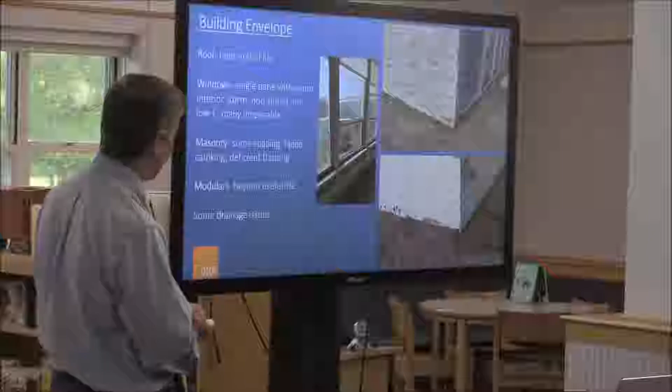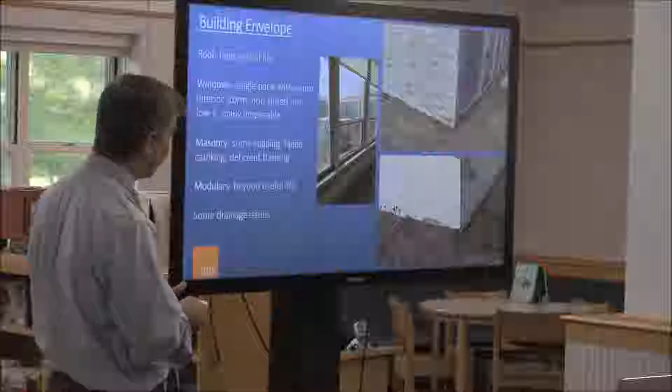We evaluated the physical aspects of the building too, looking at how well things are functioning today, what state they're in - a lot of materials and systems are at or near the end of their life. The building's 60 years old, some materials are still original. Certainly some maintenance has been done over the years, but it's still difficult to keep up with certain things in a way to meet accessibility requirements and so forth.

So there are various physical needs that would need to be addressed in any case, even if no project happens in the near term. By near term, we generally say 5 to 10 years that some of these things are going to need to be addressed.

That kind of summarizes it, that there has been good maintenance, but still, when things are at the end of their life, it's difficult to get parts and difficult to maintain. And certainly they're not energy efficient and don't meet those kinds of standards for equipment, motors, and building envelope of today's standards.

It's not strict, there's some room for negotiation. Certain things are strict, like they want science rooms to be 1,440 square feet — that's one of the hard and fast rules. Other things, like the size of an auditorium, have guidelines, and you can build it bigger, but if you do, the part beyond their guideline isn't eligible for reimbursement. So they use this form to make sure there's parity across the state and to keep the state's portion of the cost regulated. And again, just to remind people, we are designing for 460 students.

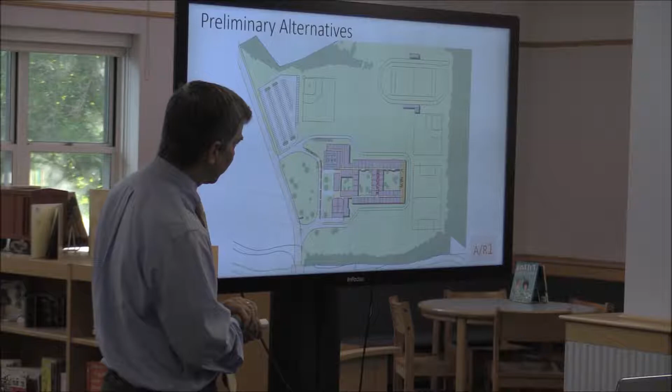So there's 2 addition renovation options. The first one keeps the entire existing building except for the modulars. Those necessarily have to be removed—they're out, beyond their lifespan. And it proposes a bit of new construction at the end of both corridors, so it's no longer a dead-end corridor. It kind of makes a loop now of circulation there.

And the floor plan for this looks like this. So we're adding this bit of space here, which has classrooms, science labs, and some open space. One thing you'll notice in this plan: we've kept the circulation where it is, but we're proposing taking down a few selective walls in places to create open space adjacent to classrooms. We've also distributed science labs to try to get closer to that notion of classroom clusters, with teacher planning rooms distributed in the building, and additional student toilet rooms around the buildings as well.

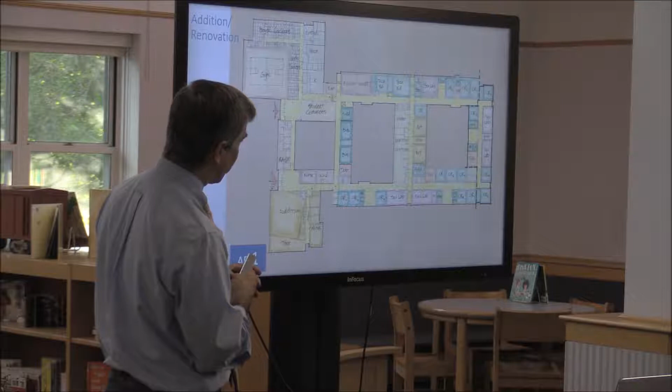So we're trying to map that diagram onto the existing building, in this case doing it with as little reconfiguration as possible, saving basically the 4 walls of the building. But all of the systems would be new and renovated—the entire window system, the roof would be replaced, and so on. The core spaces would remain basically where they are: the gym, the cafeteria, the auditorium, the library, media center. Each would be renovated, needing to be done as much as possible during the summers to avoid any downtime, because the building is going to be occupied during construction.

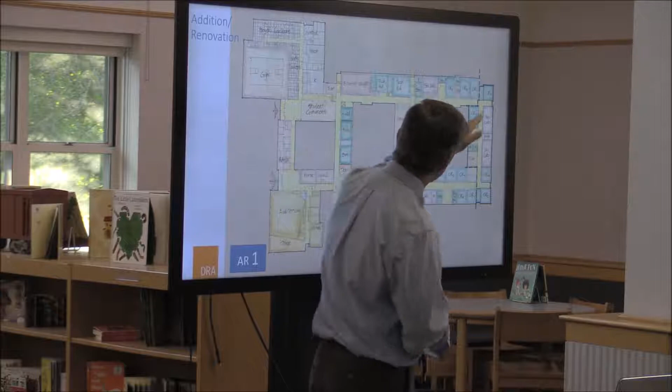The way it would get implemented: this part could be built first while the entire existing school stays in operation, and then students and teachers could occupy that and vacate some other part of the building. We anticipate that this amount of space isn't going to be enough to really make this flow, so you'd probably add some temporary classrooms as well, so you could free up an entire corridor. The students could be on this side of the building, and these become dead-end corridors that are closed off, with the contractor accessing from this side.

So we always want to safely segregate the construction from the occupancy, and it would take a couple different phases to get that done—probably, in our estimation, 3 school years of work to fully renovate the building, including maximizing the amount of work done in the summers.

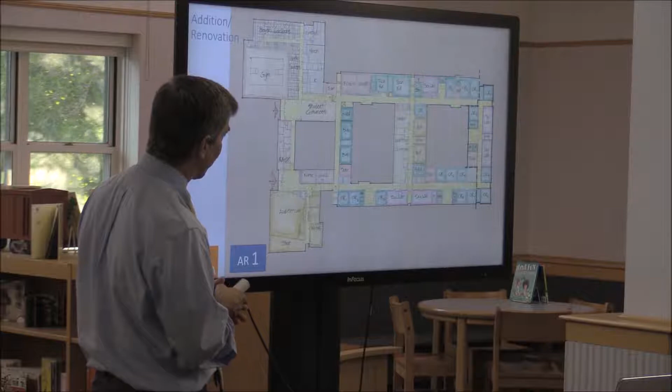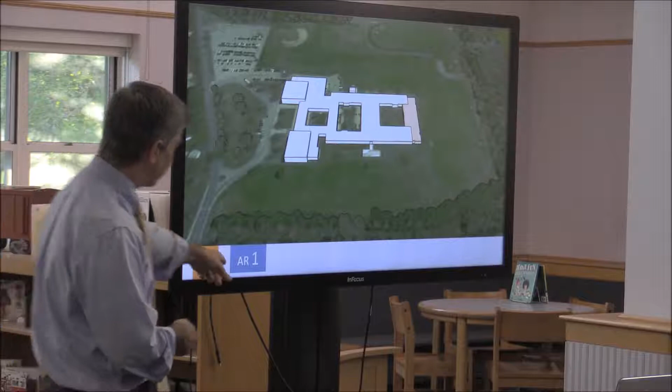And the way it would look 3-dimensionally is basically a continuation of the existing school, just closing off that end, and it doesn't really disrupt the existing soccer field. The entire site, more or less, would stay the same layout with the drop-off in front, the parking, and the fields where they are. But things would get renovated as needed—there's some drainage issues, sidewalk issues, and accessibility that need to be improved, but the basic layout would remain the same. So that's number 1, addition renovation number 1.

Number 2 is a lot more drastic, sort of the other end of the spectrum. This is more like what Mount Greylock is doing, saving the auditorium, gym, and what's currently the administration area, renovating them, and building all new academic areas.

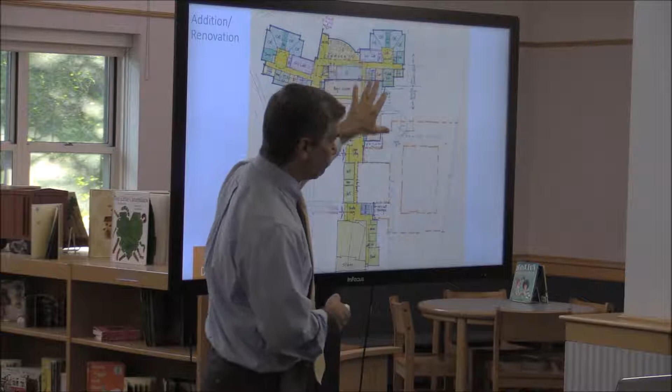In this case, they wrap around the gym with a new administration area and a new main entrance. Once those are built, the remainder of the existing school is demolished and playing fields put in its place. This would be a two-story addition, more compact, to follow that small school feel.

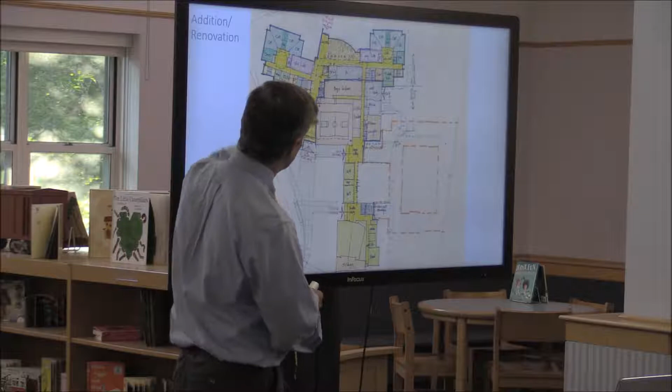These clusters are now much closer to the idealized diagram in the ed plan, where science labs are distributed, there's a mixture of classroom sizes, teacher planning rooms, some open collaborative space, and in the center of the building would be the student commons on the ground floor and the learning commons on the second floor.

Question? I'm the emergency management director of this community. You have Cleveland Reservoir, an earthen dam, which by definition is a high hazard dam, right above the school. Has any consideration been given to that? Because if that dam goes, everybody's going to be doing the backstroke. Who's responsible for that dam—is it locally controlled or the state? City of Pittsfield.

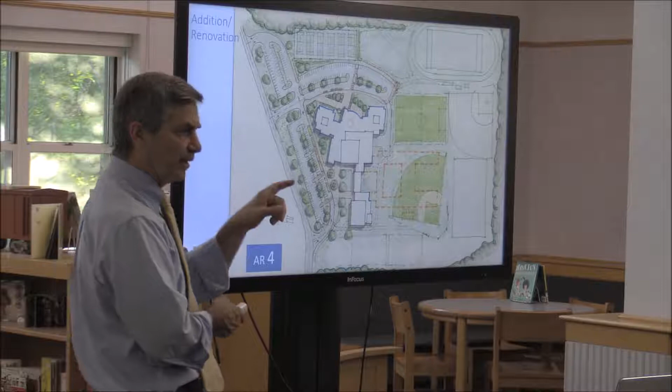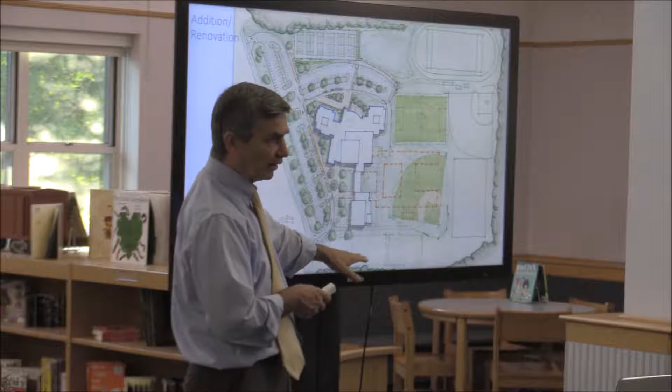We haven't considered that as part of our scope since it's beyond our property, but it's good to consider what activities here could affect it. We don't want to worsen it with vibration from excavation or something that could travel that far. It's about a mile away, but one consideration is proximity to the river and wetlands, staying out of the flood zone, and raising the footprint of the building to a safe location.

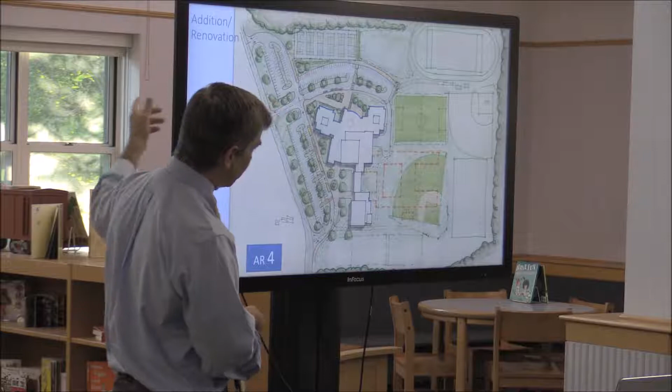I thought the intent was to move the new facility over towards the Nessacus side. We'll show you some of those in a second—that's under the new construction. This is mostly new construction, but saving some, similar to the strategy Mount Greylock is using in their high school.

Here's what it would look like: you've got the auditorium, the gym, and a two-story addition on that portion. Once the old school comes down, the baseball field, practice field, and soccer field could be built in that location, with new parking and drop-off areas. It's similar in configuration—this is still the entrance for cars and buses, with some parking in front of the school and some wrapping around the other two sides, and entrances on both sides coming into a common lobby.

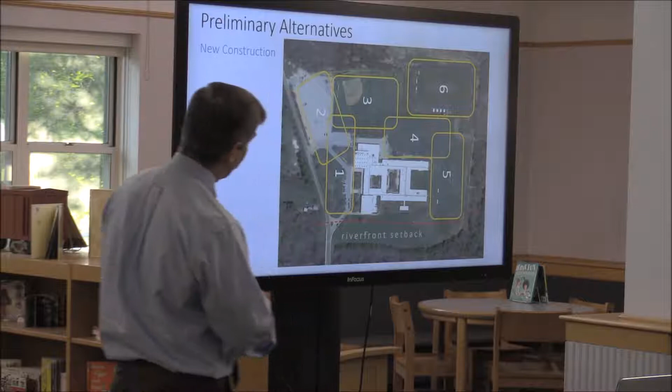Here are the options we've looked at for new construction, or the zones. There are 6 basic different zones of open space so construction could happen while keeping the existing school in operation. There was more than one option on some sites, so we ended up with 9 different options total.

The numbers indicate locations on the site. Number 1 is the location in front of the school. Number 6 is way to the back on the football field. 5 is the soccer field. 4 is the practice field alongside the school, and so forth. 2 is the parking lot. 3 is the baseball field, more or less, in shorthand.

We applied earlier criteria to narrow the list, and ended up with 3 locations, with one variation—we added a slight variation to 2A to look at different footprints, but the building is in the same location. Option 1 is in front of the school where the drop-off and green area are. Option 2 is the parking lot, a little bit onto the baseball field. Option 3 is the parking lot and mostly the baseball field.

For the options toward the back, near Nessacus, there were several drawbacks. First, that land is kind of low, wet, and subject to flooding. Second, it's a long way from the road, meaning longer driveways and utility runs that are more expensive to build and maintain. Third, despite those disadvantages, there were no real advantages to how they utilized the site—we ended up with driveways and roadways that split the site in half, and pedestrians would have to cross roadways to get to the athletic fields.

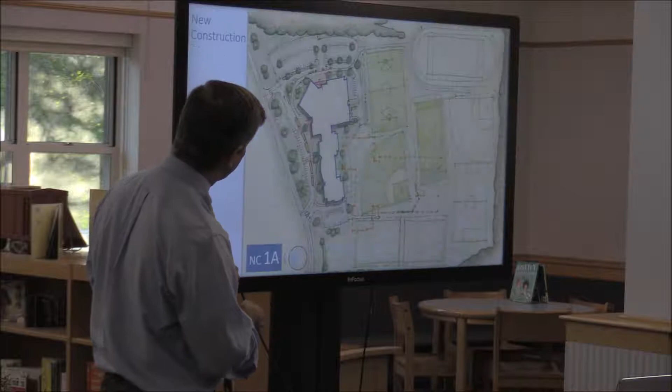So these are the ones we'd like you to consider tonight as we talk further and break into smaller groups around the table to look at the plans in detail. Number one is in front of the school, very close to the existing building. It's a linear scheme, fairly narrow in order to fit there, but there's still a drop-off for buses and some parking for visitors and a main entrance that faces the street.

Is there any consideration for solar?

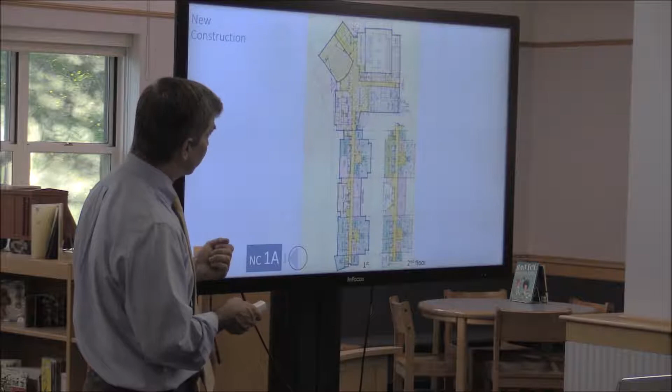There is. In all of these there'll probably be a great opportunity, either through low slope or flat roofs, to have an extensive array of PV panels on the roof. And we've heard that from a lot of folks—overall to think of the building as being as energy efficient as possible, perhaps even net zero, where the building generates as much energy as it uses. More like we're working on.

So here's what that would look like. Again, we're showing this as a massing model. It won't necessarily have all flat roofs, although it could. But essentially the academic area is 2-story, and then these are high 1-story volumes for the gym, the auditorium, and the cafeteria, surrounded by 1-story areas.

This option, number 2, 2A, in a way has similar components but arranged differently, located more where the existing parking lot is and partially where the baseball field is. The entrance would still be where it is. The drop-off is almost exactly where it is today, just aimed now at this new entrance plaza as opposed to the entrance into the existing school.

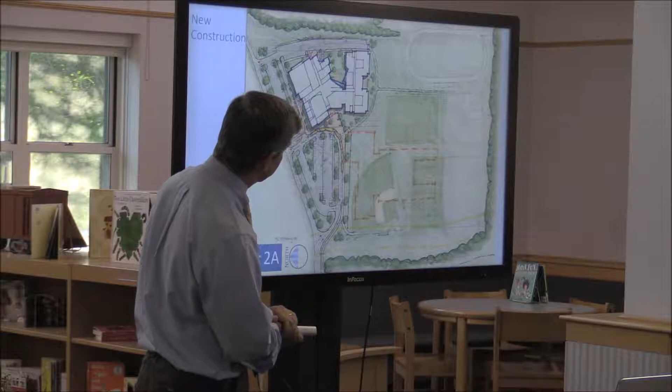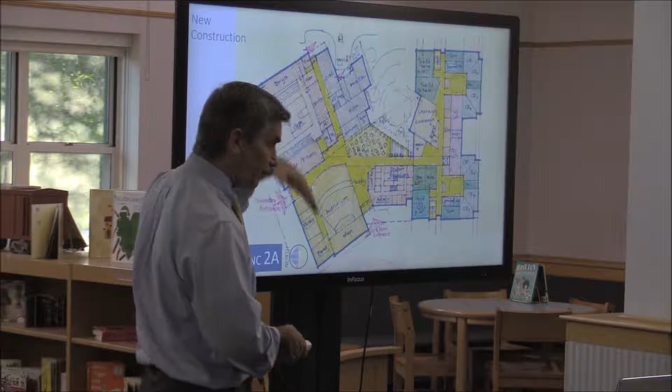Half of the parking would be located here in front of the school, the other half wrapping around the school. The floor plan: here's the front door, here's administration and student services, coming into a common lobby with the commons area and the cafeteria, which is also the lobby for the auditorium and gym, with associated music and locker rooms. The other half of the building, which could be closed off right at that point, contains the academic areas organized into clusters on 2 stories with the learning commons in the center.

The variation to that—the second floor is only on that portion of the building, kind of mirroring the first floor. Here's what it looks like three-dimensionally: 2 stories here, 1 story in the middle, and then the higher volumes for the auditorium and gym.

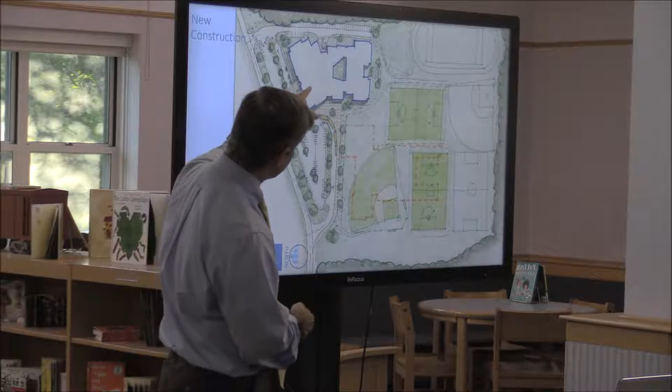The variation on this 2A.1 is to close off this courtyard and have a loop circulation. There are some advantages from a flow point of view, some feel there are security advantages to allowing kids out there since you know they're going to be there, and likewise intruders coming in is seen as an issue with an open courtyard, so that's one reason we're pursuing this variation.

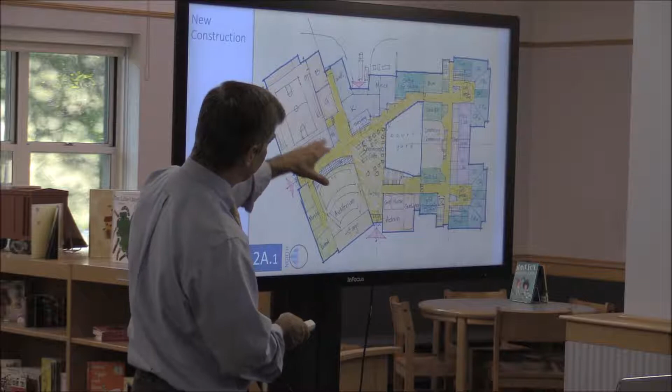Where does the state stand on the security thing? They recognize that—let's be totally honest and upfront—for intruders. Yeah, they recognize it's obviously a very important issue. They don't want to dictate exactly what everyone should do; they want to leave it up to the local districts, but they want to ensure everyone talks about it and thinks about it, and it's a requirement in our submissions that we show how we've addressed it.

I prefer that, yeah, you know. Yeah, I don't want to. Yeah, so people have a similar reaction. Yeah, you don't want an open area that allows potentially outside access—this way it's locked in.

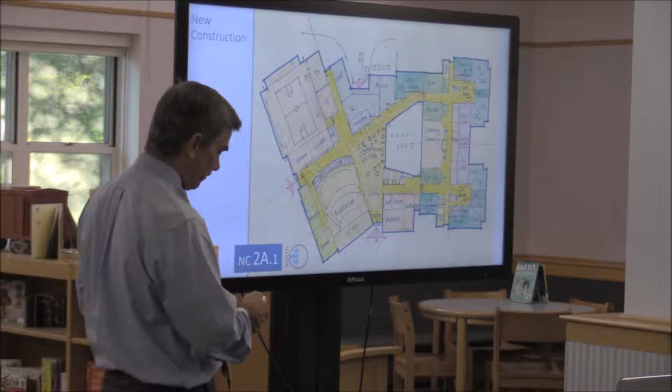Is Trooper Canada and Chief Cole looked at those drawings for that application? We're actually going to talk to them. Yeah, we talked to them on Taconic.

Well, that sounds good, and we're going to do it here too. One of the differences I want to point out: there's the thought that if you have an open court, you can still fence it in. The idea with the open design is to have a view, so that it could be fenced.

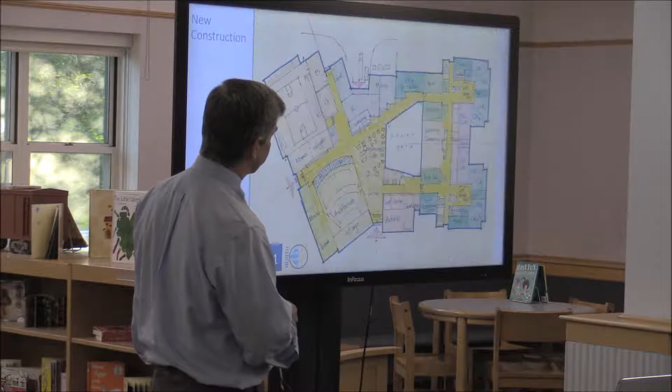We haven't talked about exactly where the existing building was on the property. Yeah, oh, okay, all right. So that's it. Yeah, yeah.

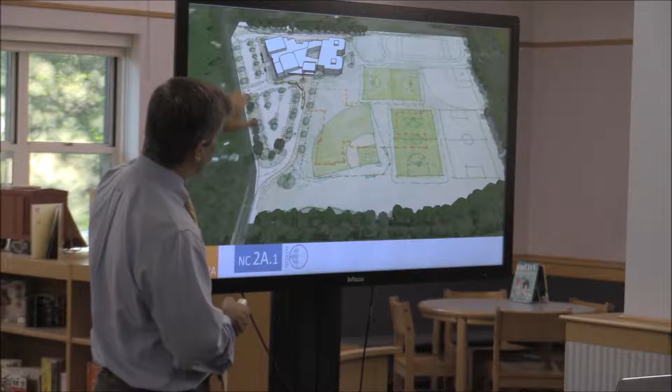In all cases, notice we do indicate a path around the building. That would be paved or certainly drivable, both for fire and for police to supervise. So typically we always want to have access around the building for supervision.

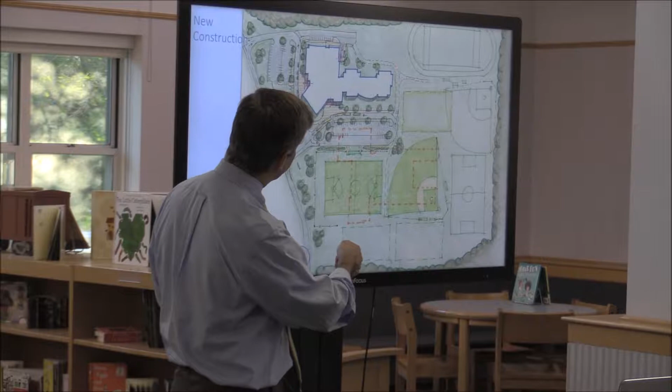The third new option has a similar footprint to the one shown earlier, but it's oriented a little differently, which for some reason is seen as a bit of a negative, since north is to the left here, towards the golf course. That means this major corridor is running north-south, so the classrooms on either side of it, even though they're in clusters, are predominantly facing east and west.

From an energy point of view, that's not the most advantageous. From a natural light and glare standpoint, it's also not the best. It's better for the corridor to run east-west and the classrooms to be oriented north and south—you can control the sun better. If you notice, even late in the afternoon, the sun comes through at a low angle and can really overheat spaces.

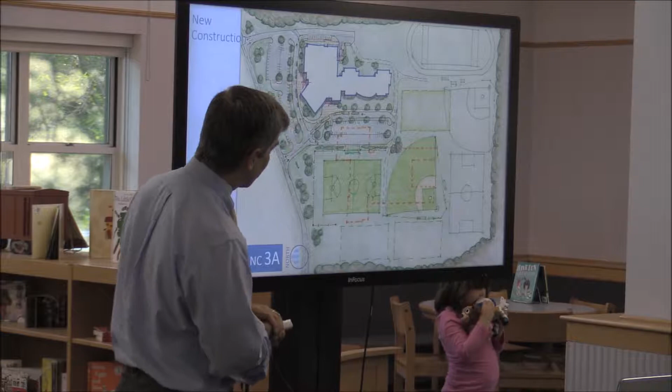This happens now at Wahconah on the western exposure classrooms—they get overheated and teachers pull the shades to try to cut it down. Your new building should have low-E glass, and it should, and will, have tinted glass too. That helps, but it's still even better if we can orient the building north-south.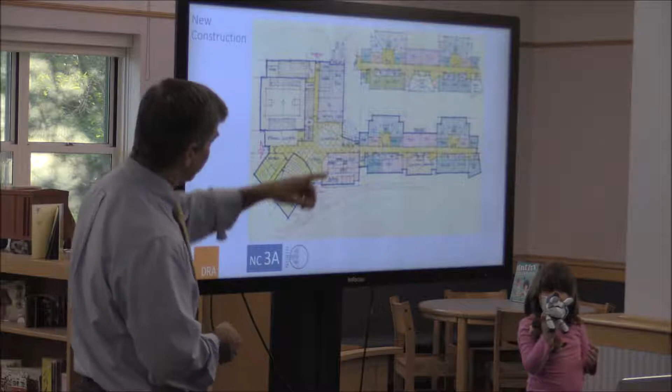So there's that same plan. Again, you can see how the components are basically arranged similarly in terms of adjacencies—it's just a question of how they're oriented on the site that varies, and where they are on the site.

When we locate the building here, we've now got more parking in the front of the school by that entrance, and the green area extends this way, closer to the street. It would be fenced in, and obviously we'd keep soccer balls well back from the road, that sort of thing. But the building is entered differently than it is now.

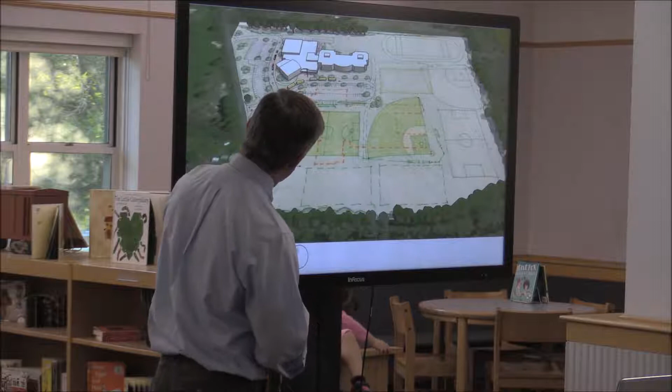Right now the entrance drive is about here at this bend in the road. This option pushes it up further east. I can't see any large parking areas. Yep, there's a large parking area here and another large parking area here.

So we should say, all of the new construction options have the building basically the same size in each case in terms of square footage. The parking is basically the same number of cars in each case, and the athletic fields are basically the same number in each case.

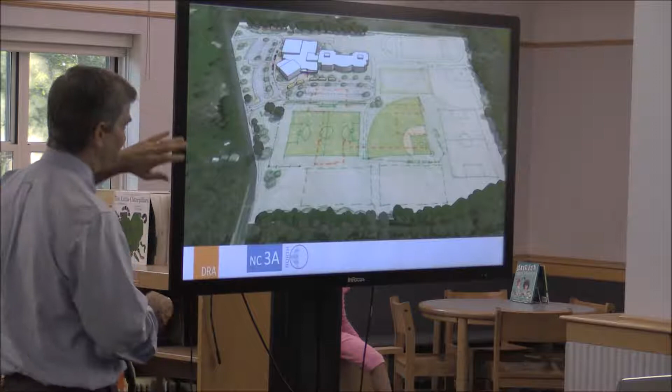I'll bring up one issue regarding the new construction options—are these all flat tops? Not necessarily at this point; that's not inherent in any of the options, that they have to be flat roof versus sloped roof. But that's a discussion for a future time.